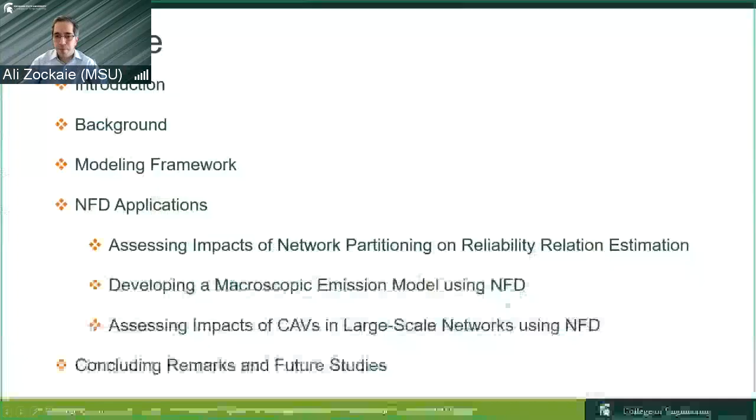This is the outline of my presentation: a brief introduction to the topic and also a brief background on the NFD and the particular topics that I'm going to cover.

The modeling framework is basically the definition of the NFD, the typical definitions that have been widely used. Then we are going to jump into three different applications, each of them a separate paper. I try to combine them together and align them for this talk since they are kind of relevant to each other.

The first application is regarding NFD and network partitioning based on NFD and its impact on reliability relation estimation. The second one is regarding application of NFD in estimating a macroscopic model for emission estimation. And the third is regarding the application of NFD to assess different market share penetration of connected and autonomous vehicles at a larger scale network.

And at the end, we're going to present some concluding remarks and, more importantly, some future research directions that we are following right now.

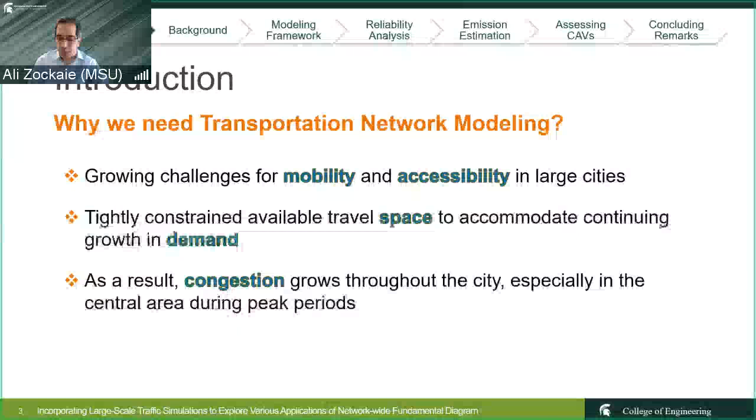Why do we need transportation network modeling? I think the answer is kind of clear for everyone here. We have growing challenges of mobility and accessibility, specifically in large cities, where we have limited space and growing demand because of the trend of urbanization we are following in our lifestyle. As a result, congestion is growing, and there is not much space available to expand the networks.

Specifically at the central part of the networks, which calls for developing strategies to combat this congestion. And to understand and combat this congestion issue, we need to consider the different components associated with transportation networks. So we have travelers, we have the supply network, and the travel demand as the three major elements and components of network modeling.

So basically, travelers travel and experience the supply. Based on that, they would adjust their decisions, and that would compose the travel demand. Then the travel demand would be implemented on the network supply, and again the travelers would have new experiences.

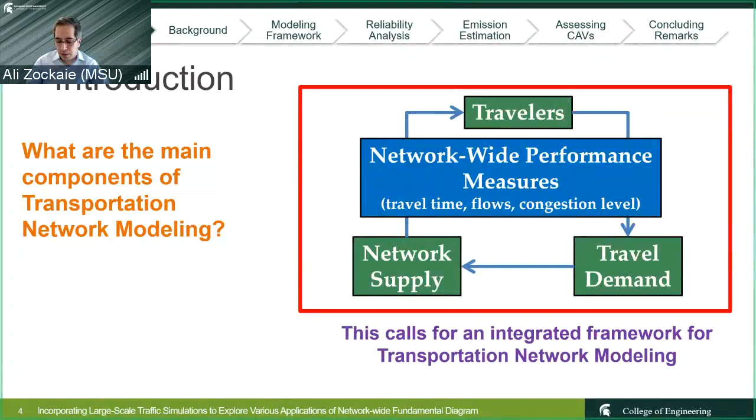And this cycle is going to continue until we reach out to something we typically call user equilibrium. At that point we would have some network-wide performance measures, and the system planner is trying to affect the network supply and the decisions that travelers make to change the travel demand as a result, to improve the system and come up with a modified performance measure.

This is where basically the NFD, Network Fundamental Diagram, also known as Macroscopic Fundamental Diagram, comes into play to assess and evaluate these performance measures at the network level, particularly for larger scale policies, not just localized improvements that we do in terms of congestion, but larger scale policies that we apply for our networks.

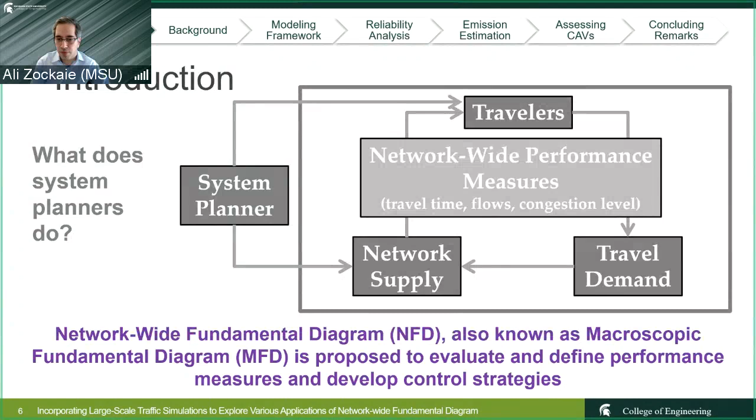So the key research questions we have here are to explore the network-wide estimation of travel time, reliability, and emission production, and impacts of connected autonomous vehicles. We would incorporate the NFD as a tool to monitor traffic dynamics, and also use a simulation-based dynamic traffic assignment tool to estimate NFD.

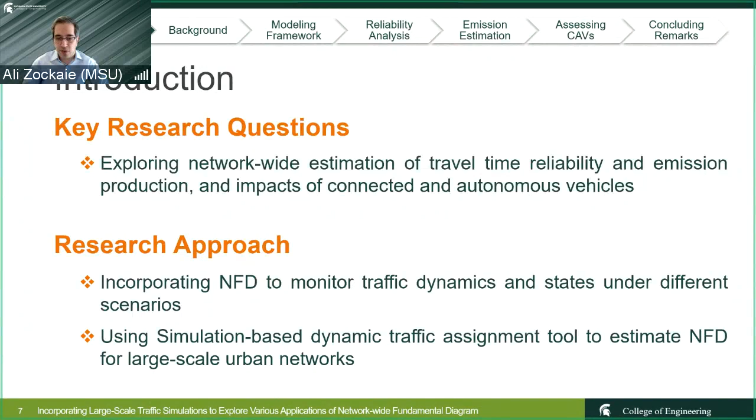So basically, to explore those impacts, we are going to use NFD, and to estimate NFD, we are going to use a simulation-based dynamic traffic assignment tool, which is basically DYNASMART, developed by Professor Mahmassani over the last 30 years, I would say.

So first, a brief background on the topics. The first earlier network level works go back to the 1960s, and Godfrey was one of the first studies in 1969 that observed a non-monotonic relationship between speed and flow at the network level.

Herman and Prigogine developed a two-fluid theory in 1979. And in 1984, Mahmassani et al. presented the network-wide relations between flow, density and speed. They observed via simulation, and in 1993, they observed the hysteresis phenomena.

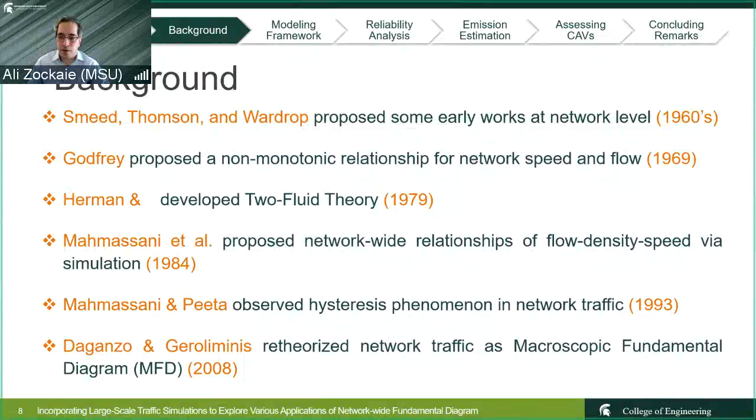Ultimately, for a couple of years, there wasn't any active research in this domain until in 2008 the NFD concept was really theorized and called the Macroscopic Fundamental Diagram. And the study by Daganzo and Geroliminis was one of the prior studies in this field that kind of snowballed into other studies.

Also, in addition to estimating NFD, along with that goes the applications of NFD, significant applications in perimeter control, and more recent studies on macroscopic dynamic routing.

To avoid the computational deficiencies of simulation dynamic traffic assignment tools, we want to move on to more macroscopic approaches, but still capture the dynamics of the network. NFD or MFD provides a great opportunity for that, and there are many studies on that over the last 3-4 years.

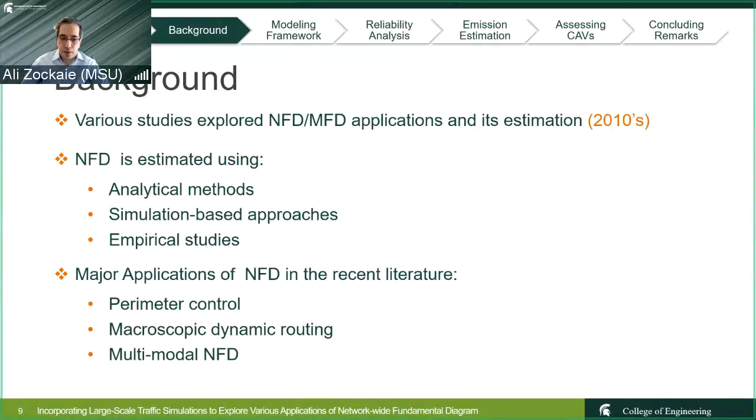In addition, right now multimodal NFD is another approach we are looking at. Back to the limited space that we have, shifting from passenger cars to buses could be an option. There are certain recent studies on multimodal NFD as well.

So with that, we are going to jump into the three different topics that we have and provide a brief background in each. Microscopic simulation, empirical data, and also simulation-based dynamic traffic assignment tools have been developed over the last 10 years to study travel time reliability.

One of the approaches was to capture a network-wide travel time reliability measure, which has been observed via NFD in multiple studies, as you can see here in this slide.

One of the major things we felt is that the homogeneity of the network is a key component of NFD. Once we are dealing with a heterogeneous network, there are certain studies working on partitioning the network into more homogeneous subnetworks.

One of the major things we want to study here is how this network partitioning and having more homogeneous NFDs would affect the travel time reliability relation estimation.

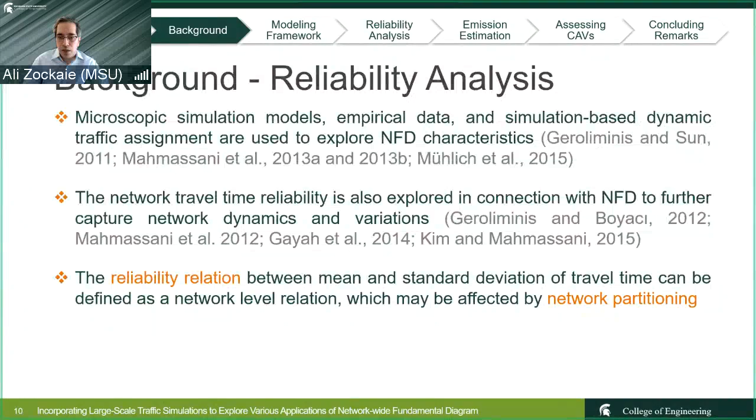In addition, a kind of different topic in terms of emission estimation: we have microscopic modeling as one of the approaches in this domain. There have been lots of studies there, and there are packages already available for that, like CMEM and MOVES-Lite.

On the other hand, we have macroscopic emission models as well, with certain tools developed for those too. The issue with the microscopic model is similar to the issue we have with traffic simulation: they are resource intensive and cannot be applied to larger scale networks. The major issue with macroscopic models is that they ignore the vehicle dynamics, traffic dynamics basically.

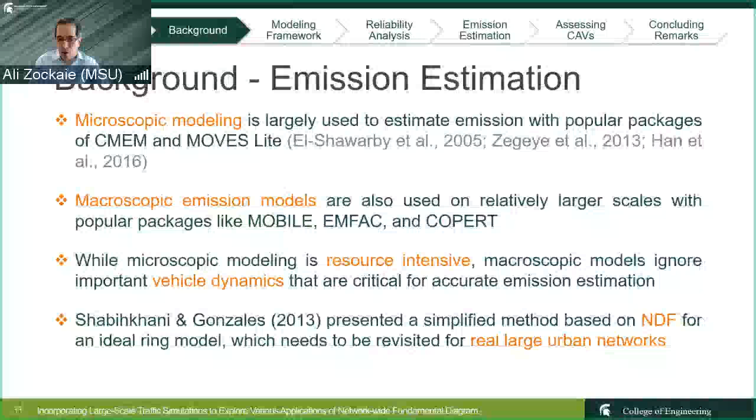One of the earliest studies related to what I'm presenting today was done by Shabihkhani and Gonzales in 2013, where they tried to relate NFD with emission estimation, but it's simple, using the ideal ring model for basically an intersection control concept. Now we would like to revisit that concept, but apply it to larger scale urban networks.

Finally, the third application we are going to cover is about assessing the impacts of CAVs on transportation networks. At the segment level, there have been lots of studies in this domain, most of them applying microscopic simulation.

But at the network level, there are only a few studies that have been done. I've listed three of them here. Still, there is a need to consider certain elements in the evaluation of CAVs at the network level, considering mixed traffic combining regular vehicles.

I know that RVs might be a little misleading, with trucks, vans, and RVs, but here we are referring to regular vehicles. CVs refers to connected vehicles, AVs refers to autonomous vehicles, and CAV stands for connected and autonomous vehicles in terms of terminology.

Considering a mix of these different vehicle types during the transition period from the regular and conventional vehicles we have right now towards a fully connected and autonomous system, there is going to be a transition period, and it's important to capture network characteristics during this time.

We would have heterogeneous drivers in terms of regular drivers, regular vehicle drivers, and also connected vehicle drivers, so we need to consider that factor as well.

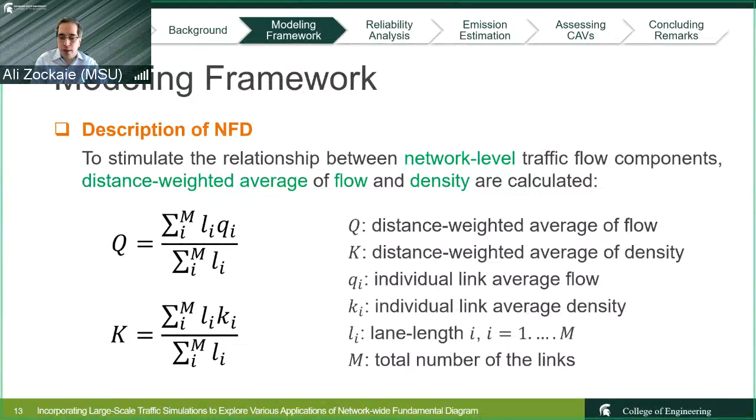One of the key important factors in defining the average flow and average density over the network is to calculate the weighted average. There were some early studies in this domain that ignored this fact. I recall when I was a PhD student, trying to define an NFD, the shape wasn't well defined without this weighted average. So it's important to calculate it based not just on length, but also on the number of lanes. The length of the links plays an important role in capturing the average flow and density in the network.

The other part of the modeling framework I'd like to talk about is the definition of the travel time reliability relation. It has been observed, by applying simulation-based dynamic traffic assignment tools, that you can define a relation between the mean travel time and the standard deviation of travel time. Once you know the mean travel time, you can estimate the standard deviation using linear regression, or other models, though at the network level the linear model shows promising results. One key element is that travel time needs to be normalized by travel distance, so mean travel time per unit distance is linearly related to the standard deviation of travel time per unit distance at the network level.

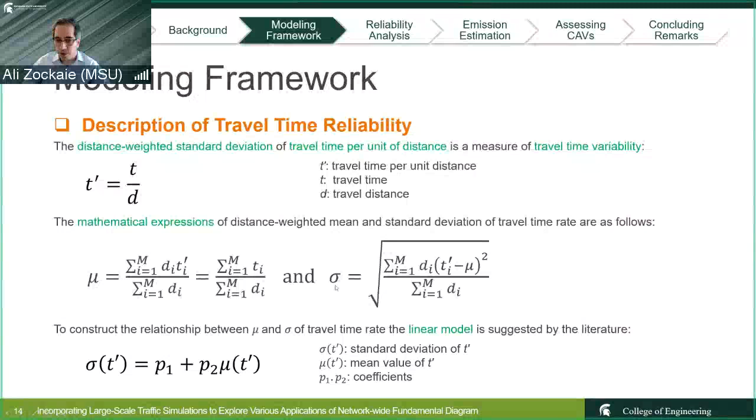As you can see, the relations are shown here. We've defined T prime, which is T over D, essentially pace, the inverse of speed. We use the weighted average based on the distances between different links in the network to calculate the mean travel time, and also the weighted average over the deviations from the mean value of travel time per unit distance to capture the standard deviation. Ultimately, we have the standard deviation related to the mean travel time per unit distance, with two coefficients that need to be estimated for the reliability relation. With that, we'll go through each study, and then come back together to discuss future studies relating these three applications to each other.

For the travel time reliability analysis, the main objective is to improve reliability estimations by incorporating the NFD. In that regard, we need to apply partitioning techniques.

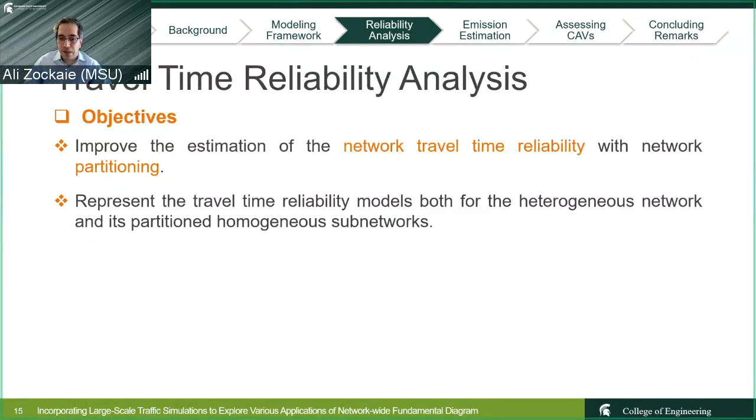One thing that needs to be considered is that clusters should be defined with certain constraints, so that links belonging to the same cluster are all connected to each other. We wouldn't want islands of links conforming to the same cluster. So connectivity is an important issue to be considered.

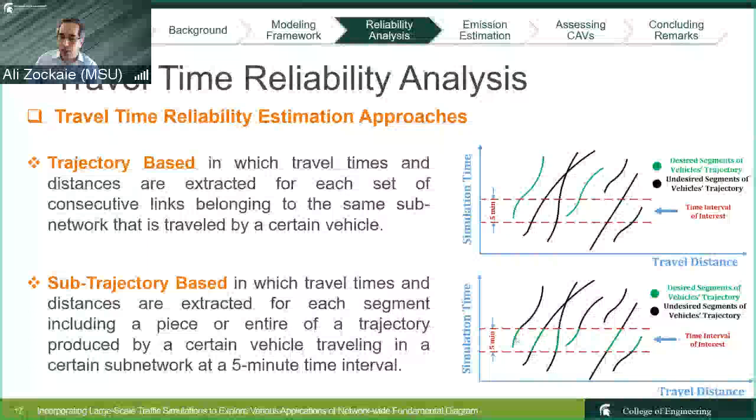In the other approach, the sub-trajectory approach, we focus on the actual travel the network experienced during that 5 minutes. In this case, you don't care when the trajectory was generated. If a vehicle trajectory is traveling in the network during that 5 minute interval, you just capture that 5 minutes of the trip for that trajectory, which might be less than 5 minutes—not necessarily equal to 5, since it might have been generated within that interval—and the distance would be whatever is associated with that.

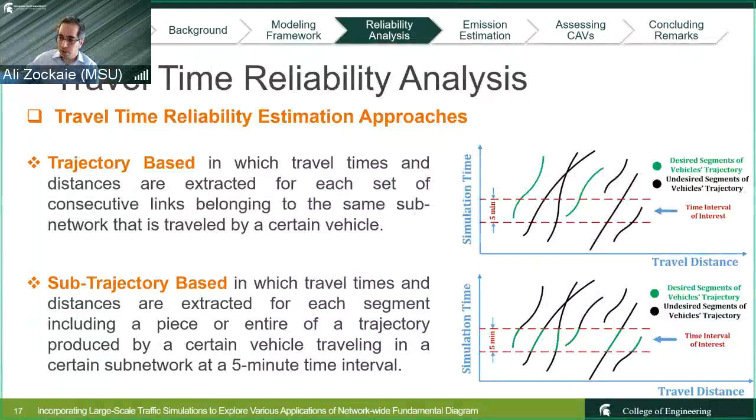And for the other ones which have been generated earlier, we would have the travel time equal 5 minutes, and we would just divide it by the distance that they have traveled in that 5 minute interval. Then we would calculate the average between these values and also the standard deviation, and that would be one data point. Then we would move on to the next 5 minute interval, which would give you another data point to be able to calibrate the linear relation.

So basically, to observe the impacts of the network partitioning, we considered a larger scale network. As you can see, we have the Chicago metropolitan area network, which has been simulated, with 40,000 links, 13,000 nodes, and 2,000 zones.

This is the demand profile that we have for the entire day, as you can see. So we have some base demand that would always populate the network, even during what I think is midnight, so this is kind of early morning. This is again late in the night. This is kind of the base demand that we have over the 24 hours. This is the AM peak, this is the PM peak.

But to be able to apply the net partitioning algorithms and also to have a better sense of the congestion, because this network is really large and there might not be much congestion around here, we decided to just focus on a subset of this network, as you can see here, which includes about 10,000 links, and perform the clustering approach for that. And to just give you a scale, this part that you can see here is just the CBD, or Central Chicago downtown area, basically. We should call it the Loop as well.

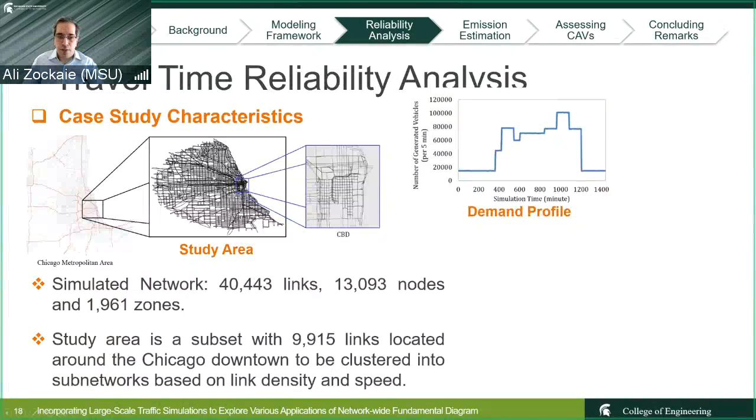So this is the study area where we are trying to estimate the travel time reliability measures and also perform the clustering or partitioning. So this is the simulation result, just showing the results for the AM peak, PM peak, and the off-peak period between.

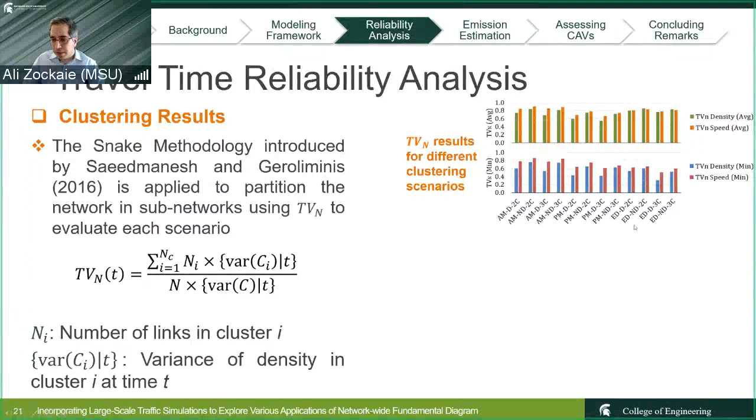So here are the results for different scenarios that we have used. First of all, we have done different analyses for AM peak, PM peak, and the entire day, AM, PM, and ED. Also, we have tried 2 clusters and 3 clusters, and we have tried the directional and non-directional approaches that I just talked about. So as you can see, for AM, we have 4 cases: 2 clusters and 3 clusters, directional and non-directional, and we have the same thing for PM and the entire day as well.

And here the results are shown. Clearly, in all of them, you can observe that once you move from 2 clusters to 3 clusters, the TVN is improving. So that shows that the 3 clusters have better characteristics in terms of homogeneity of clusters. If we increase the number of clusters to 4, it is expected to have an even lower TVN. However, that would make the computational efficiency significantly problematic, so that's why we just stopped at 3 clusters to show the applications of the NFD and its impacts on the reliability measures estimation.

Here we have shown two different measures for TVN. One is just the average value over the day, and the other is showing the minimum observed TVN over the study period. So here's AM peak, here's PM peak, here over the entire day. This is the minimum TVN that is captured, but this is the average over the entire day.

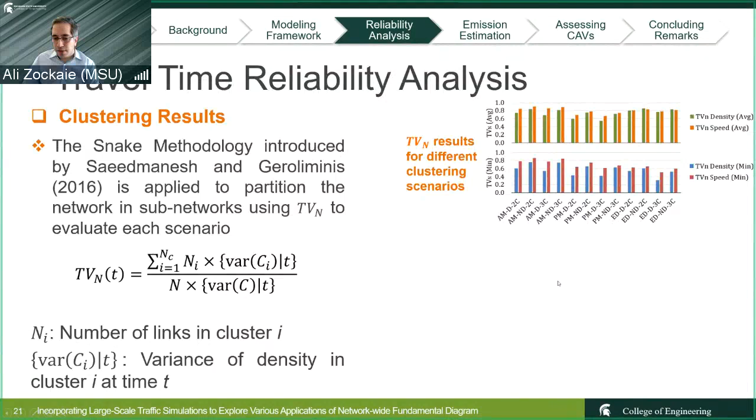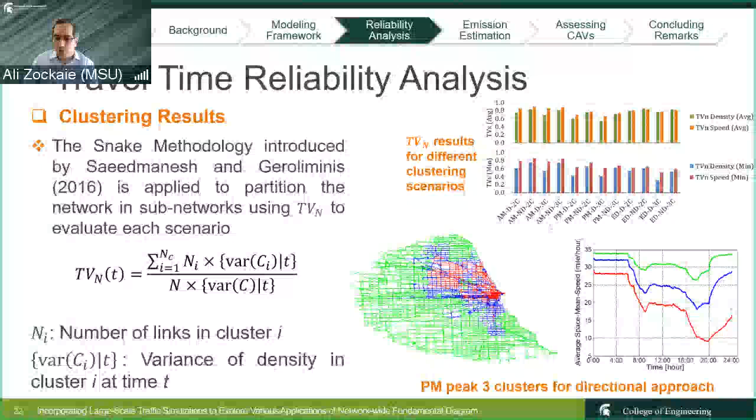And this is just one sample of the clusters. As you can see, the really low congested area around the network, illustrated by green here, is the speed profile for that cluster. Then we have the red and blue, which are moderately congested and severely congested clusters. So this is showing the clusters for PM peak, the three cluster case, applying the directional approach. This stands for PM, directional, and three clusters. So this is the TVNs associated with this scenario.

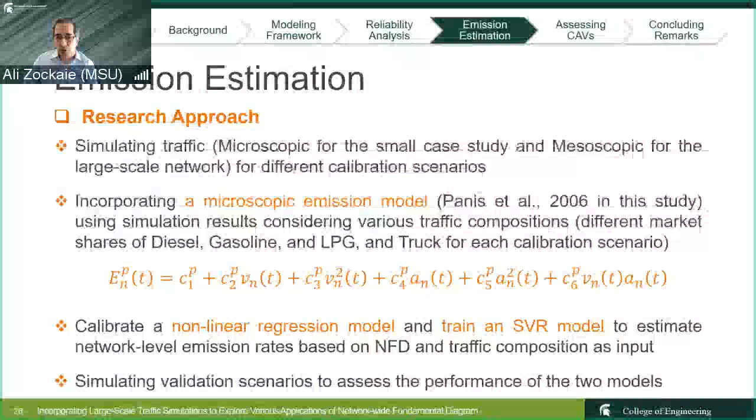Once we simulate the traffic, we apply a microscopic emission model. In this case, we went with the Panis model, which is a function of velocity and acceleration. For different vehicle types—diesel, gasoline, LPG, and truck—we have different coefficients for velocity or acceleration.

So once we do the simulation for different scenarios, we're able to apply the micro emission models and get the actual emission generated at the network level.

Then we have calibrated a nonlinear regression model, and we have trained an SVR model to estimate the network level emission based on two factors: one is the NFD or MFD, the network fundamental diagram statistics, and the other is based on the traffic composition.

So it's not just about how much congestion you have, it's also about how much emission is generated by those vehicles. If you have a network with all electric vehicles, for instance, there won't be any tailpipe emission generated there. This is an important factor that needs to be considered.

Also the NFD, showing whether the network is congested or not, what the accumulation of vehicles in the network is, and all of that—they impact the emission, obviously. Ultimately, we simulated other traffic scenarios to validate the nonlinear regression model and the trained SVR model, to compare how well they estimate the emission.

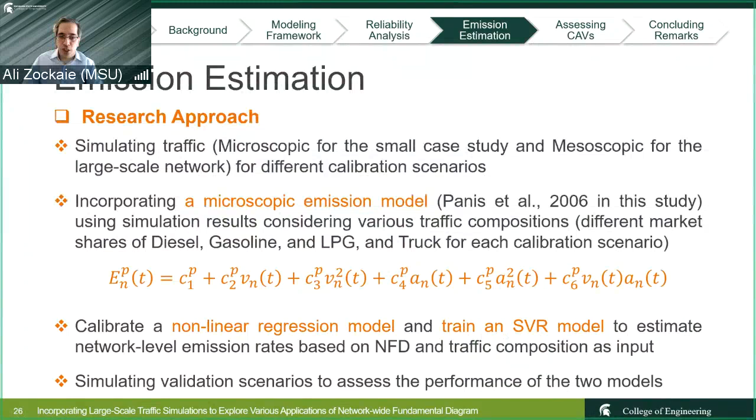So just by knowing the NFD characteristics at any given time—the average flow or average density at the network level—and knowing the traffic composition, how many of which vehicle type we have at the network level on average, we can use the macro emission model developed in this study to get the macro emissions, and we would have the network emission diagram that we'll talk about at the end.

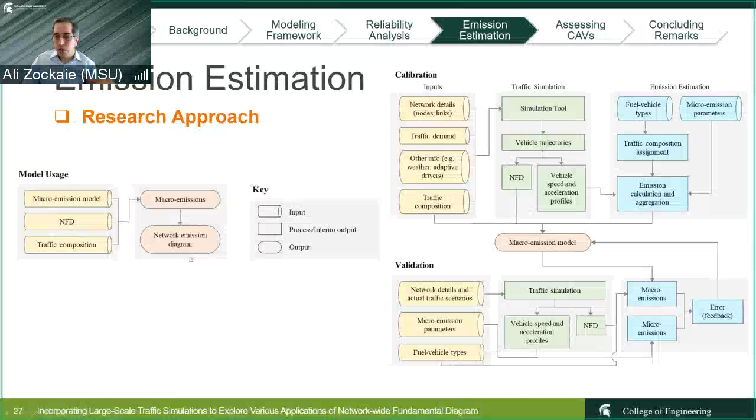So here's the calibration process: we run the traffic simulation, apply the micro emission models, calculate the emissions, calibrate the macro emission model, and then we apply validation scenarios to compare the macro emission and the micro emission.

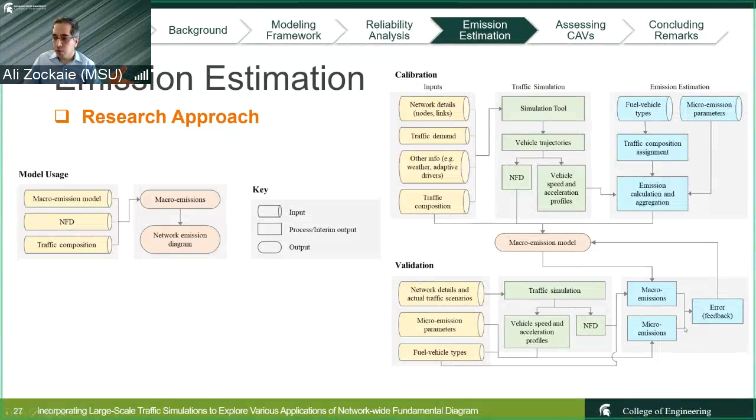The macro emission comes from the macro emission model trained and calibrated here, and the micro emission comes simply from simulating the validation scenarios. Then we have the errors that we'll discuss in the numerical results.

Here we have O'Hare Airport, if you're familiar with the network. And here, somewhere around here, we have Northwestern University's campus in Evanston.

This is the demand profile for one particular scenario—this is how the demand is changing downtown, and this is how the generated vehicles are changing in the Chicago CBD. This is defined as Chicago downtown, this is defined as Chicago CBD.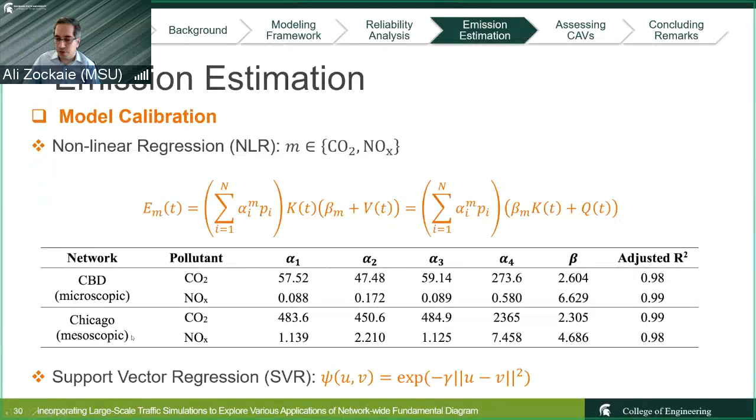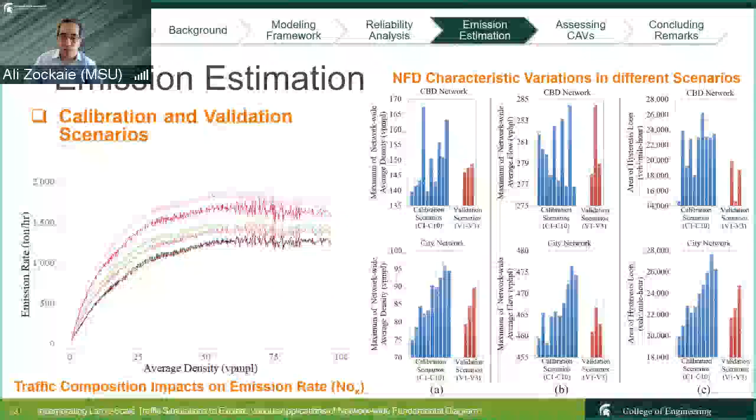The results demonstrate that the average error is less than 10%, which is acceptable, and the SVR model is doing much better than the nonlinear model. However, even the nonlinear model might be around that percent. For the SVR method, it was below 5%. Obviously, the SVR model is outperforming the linear and nonlinear emission models.

And here is the network-wide emission diagram. One thing that should be noted in this diagram is that we are showing the emission rates, not the total emission. Having lower emission rates here by itself doesn't mean the situation is becoming much better.

It could be that you have much more emission overall, because the emission rate might come down as speeds come down, but the vehicles would be on the road for longer time because now the output rate of the network is dropping as well - basically the flow rate is dropping, so vehicles stay on the road longer. So the total emission generated would be higher. Although we observe a reduction in emission rates, since those lower rates are generated for a longer time, overall more pollution would be generated. That needs to be considered.

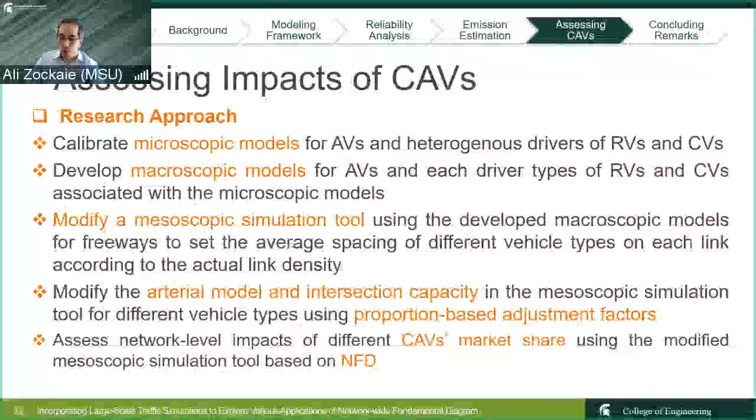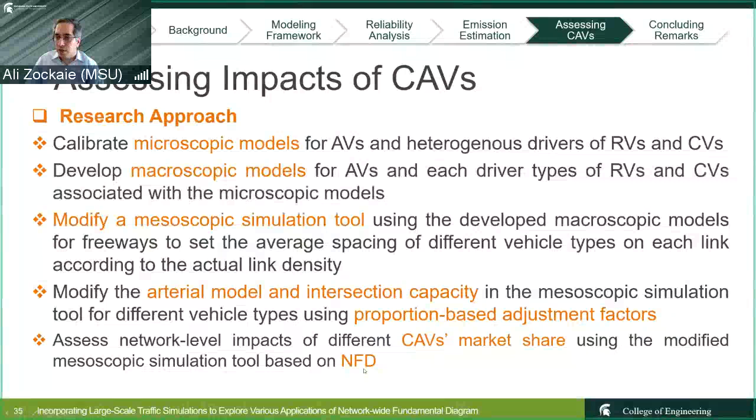So that's the major modification we have done for the freeway portion. We also modified the intersection capacity and arterial models, but due to lack of data in the arterials and intersections, we came up with some proportion-based adjustment factors defined based on comparison of the freeway models for different proportions of CAVs or regular vehicles. Ultimately, we assessed the impacts of different market penetration rates on the NFD and showed how different penetration rates of CAVs affect it.

For micro simulation of vehicles with no communication, we used the model presented by Hamdar et al. in 2015, but considered the heterogeneity among drivers, defining different microscopic models for different driver types. For V2V, since we don't have data, but to capture the impacts of connectivity, instead of using the Hamdar et al. model, we use the IDM model, which is more deterministic. We assume that the more information we have, the stochasticity would reduce.

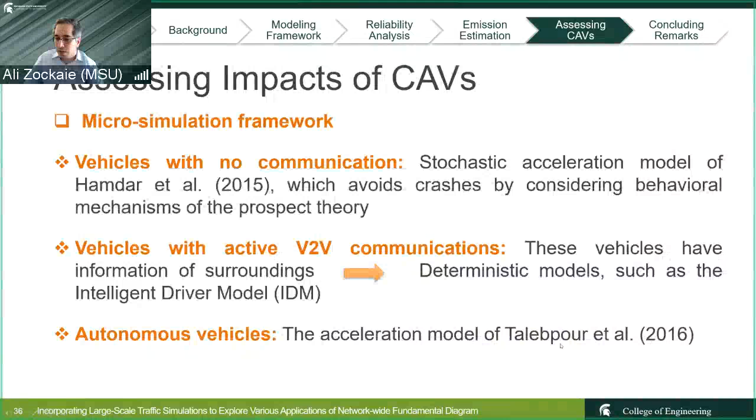Each of these stands for different models for the heterogeneous drivers we have, based on speed and different proportion of vehicles. So we have different vehicles belonging to different vehicle types at different links, and they would have different spacing on the link based on their speed. We calculate the weighted average of the spacing, and the inverse of that weighted average would be correlated with the density at the link. That's how we come up with the macroscopic approach.

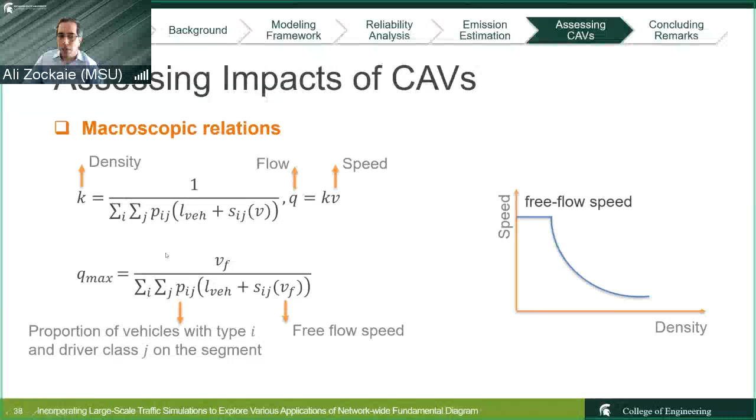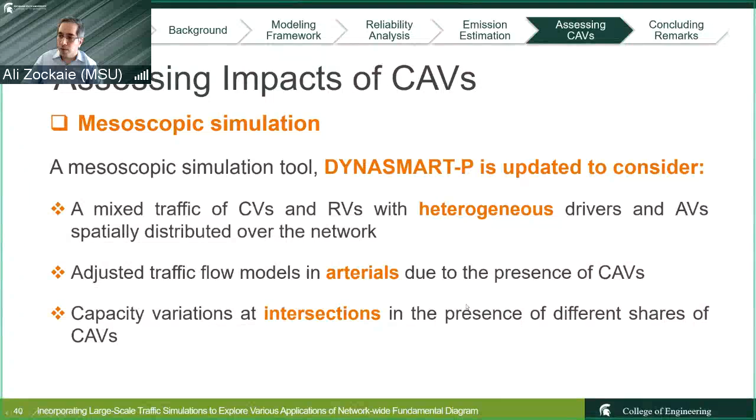Ultimately, for the mesoscopic simulation, as I mentioned, we use the average macroscopic model approach for the freeways. For the arterials and intersections, we simply use the adjustment factors we load, based on the relations observed on the freeway and mainly the maximum flow rate.

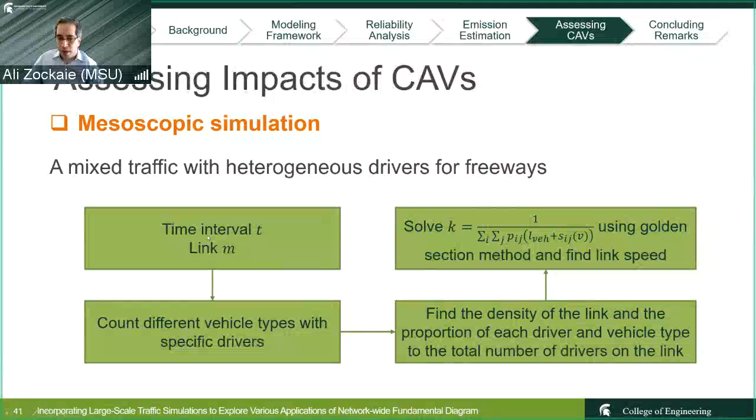So here is again the explanation on how the mesoscopic simulation works. At any given time and for any given link, we know the different vehicle types on that link. We know the number of vehicles divided by the lane length, which gives us the density. Then we try to find the average speed, which gives us the average spacing, calculated for different vehicle types on that link. That gives us the same average spacing, whose inverse would be equal to the density.

So to solve this nonlinear problem, we apply the golden section method, and we have solved it and simulated the traffic. Similar to before, we considered the Chicago City downtown network for simulation, looking at 5 to 10 a.m., with around 800,000 vehicles simulated.

We assumed in the base case scenario that 25% of vehicles have access to en route travel time information, but we assumed all CAVs would automatically have access to en route information if a vehicle is connected or autonomous.

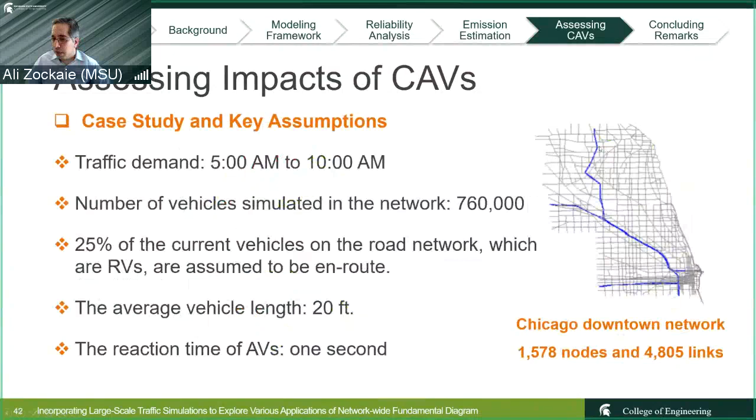Now we have added adaptive traffic flow models on the freeway links. As you can see, a significant shift between autonomous vehicles and connected vehicles can now be observed. However, it's not that significant, mainly because in this network, as you can see, the blue lines are the freeways, and most links are arterial—there's not much freeway available. So it's expected that alone, we wouldn't observe much impact from this modification to the simulation tool.

Once we apply the arterial links, you can see the difference between red and blue is more significant. We also adjusted the arterial link models based on the freeway models for comparison. Then, once we apply the intersection models, you can see much more improvement, and a much more significant difference between connected and autonomous vehicles.

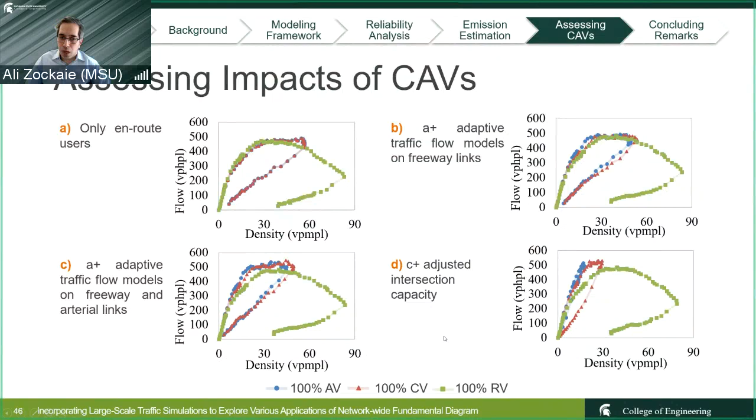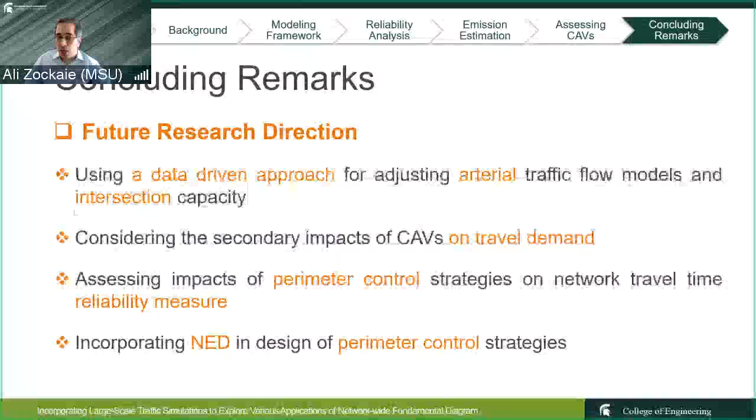So with that and the conclusions, we showed the applications of the NFD in different applications like travel time reliability analysis. We showed how network partitioning plays an important role there. We showed how we can use NFD to estimate a macroscopic model for emission, considering the dynamics of the network. And also we showed how we can use NFD to assess the impacts of connected and autonomous vehicles at the network level.

For future research directions, the main reason I included these two together is that, first of all, we still need data-driven approaches for arterials to modify the models we talked about. Instead of just going with the adjustment factors we developed, we can use data-driven approaches with new sources of data on the arterials, with and without connected and autonomous vehicles.

Also, we would like to consider the impacts of CAVs on travel demand as well. What we showed here was that the demand is fixed, but vehicle type and vehicle combinations are different, so how would the scenarios look. But obviously, if you reduce congestion, there would be more people willing to use the roadways because it's less congested, so there would be some demand following up on that. Also, if you have an autonomous vehicle that you're not driving yourself, you're willing to make more trips as well because you have a reduced value of time. That's also another important factor to be considered in future research.

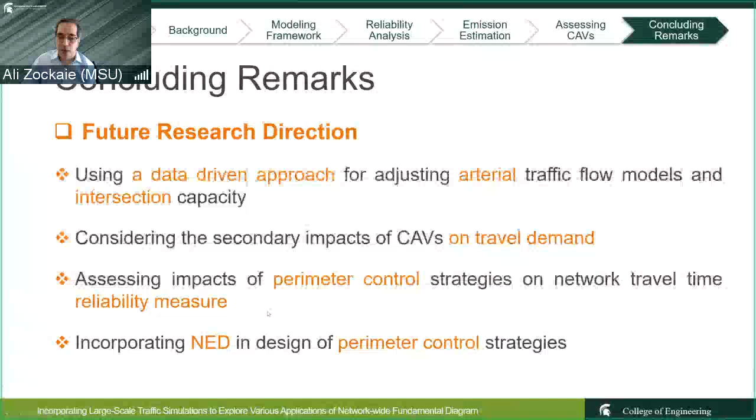But the last two, which are my favorite ones, are to apply perimeter control strategies and see how the perimeter control strategies and the clusters would change the network travel time reliability measures. We expect there would be significant improvement, but it's good to study it. And also how to apply the NFD concept we talked about for perimeter control strategies - another interesting topic for future research.

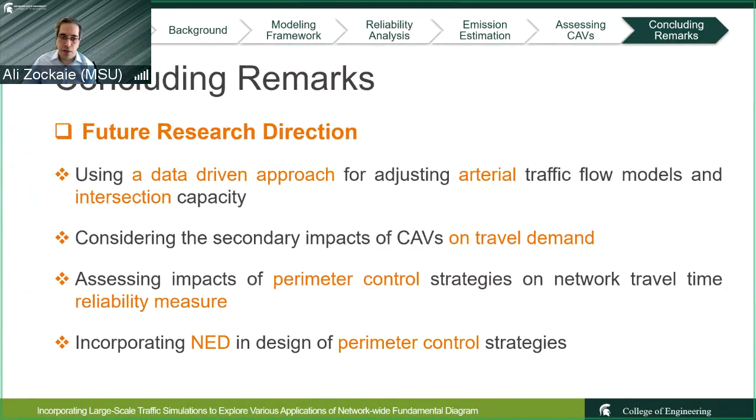Here are my great collaborators. I'm honored and it's my pleasure to be a student of Hani Mahmassani's group. I've learned a lot and will continue to in the future. For travel time reliability and clustering, Nikolas and Mohammad Reza Saeedmanesh from EPFL, they helped us a lot. Miyad is my dear friend, and we have worked on the NFD concepts in multiple papers together. Ali Reza helped us with the micro simulation portion of the connected and autonomous vehicles.

And my dear colleagues at MSU, without whom this research wouldn't have been possible at all. Specifically Fatima, I think she should be on this call as well, for her great work on connected and autonomous vehicles and modifying DYNASMART. And these are the three publications, all happening in 2020, for each of the topics I covered.

And with that, I'm going to stop. Sorry it took longer than what I expected. I think I wasn't paying attention to the time in the first part and spent lots of time on that one, sorry about that.

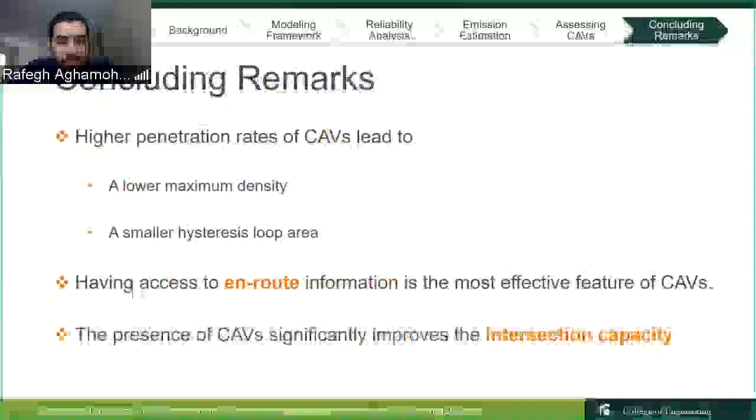So I'll go first, I have a few questions. You can go back to slide 23. Cannot see the slide numbers. Oh yeah, yeah, it's...

Okay, so you show some MFDs there on the top row. Are those the MFDs for the whole network or for clusters? So first of all, there are NFDs of the peak period, I think PM peak, so that's why we are observing really short period changes there.

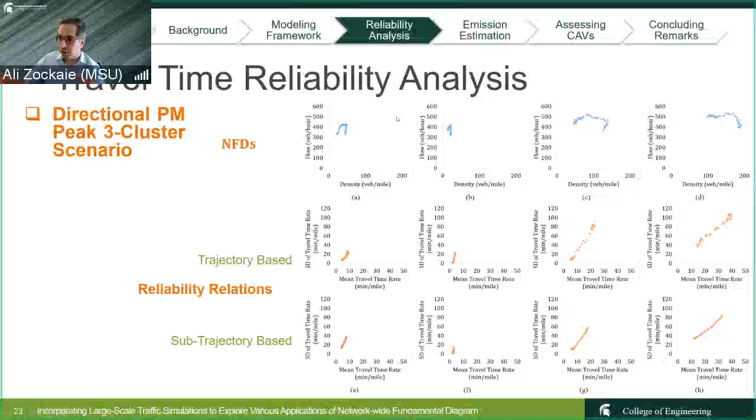And the first column here, for NFDs and reliability relations, is where you have just one cluster - so it's one network for the entire network. Then I should have explained that better, sorry about that. The second column is for the three clusters that we have - cluster 1, cluster 2, cluster 3. In a way, you can say the average of clusters 1, 2, and 3 would give you this. So the average of these three would be equal to this one. And as you can see, there is much similarity between this one and the first cluster, because the first cluster has the largest size, so obviously the average would be closer to the one with the largest size.

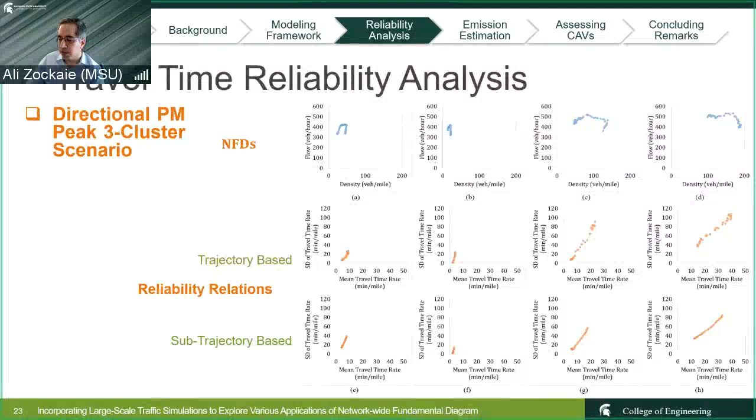So another question about the second part: do you use, for the emissions estimation, only one MFD for the whole network?

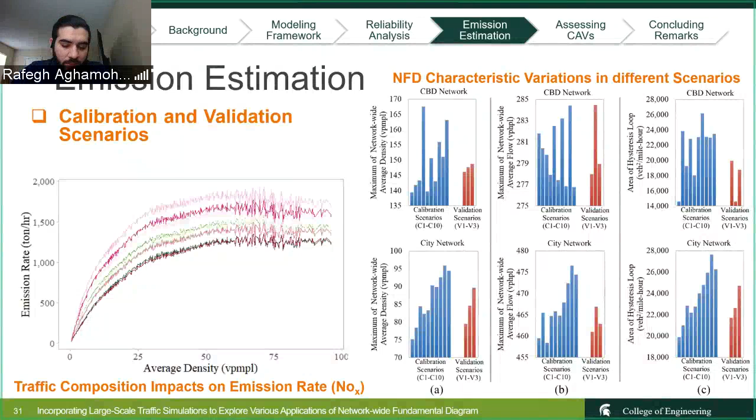So as you can see here, we had different observed NFDs for the whole network. For each simulation, you derive different MFDs - observed NFD basically, and simulated NFD. So we simulated different NFDs for each scenario.

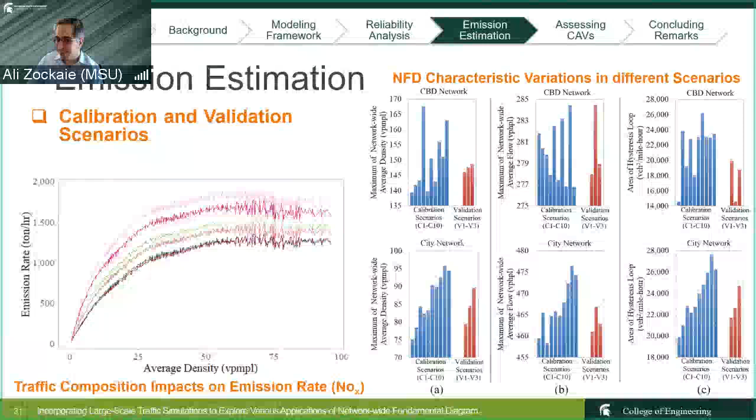In addition to the NFD, we also tried different vehicle combinations to generate the emissions. If all the vehicles were diesel, or all gasoline, the emission rate would be different. So for the calibration process, we had 10 different NFDs, and you can see their features, how they differ - here's the maximum density, changing between 140 to 170.

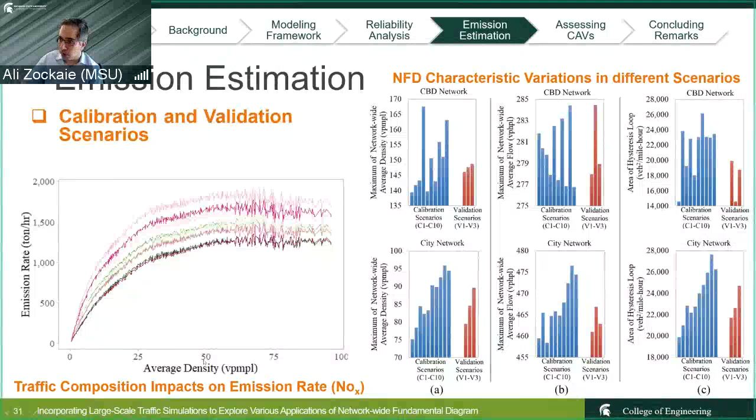This is the maximum average flow observed in different scenarios, and this is the area of the hysteresis loop, changing over the different scenarios. We simulated all these scenarios with different micro emission models for the traffic compositions as well, which gave us the huge data sets used to calibrate the macro models.

I have a couple of quick questions. My name is Baher Abdulhai from U of T, University of Toronto. If you could go back to slide 19.

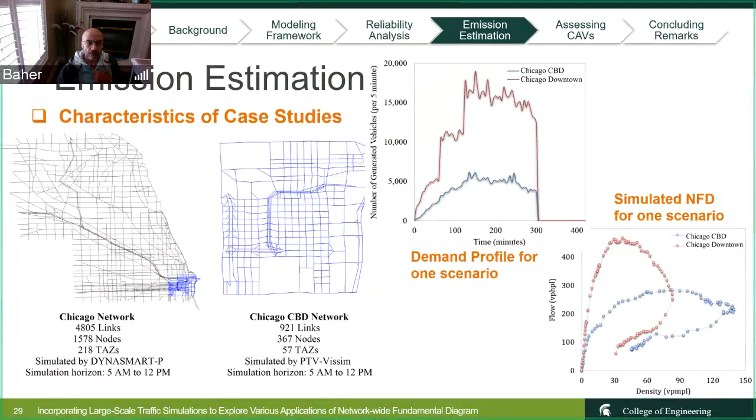On the top right, you have - I don't understand the MFD there. It's peaking at flow of about 400, then at density around 20 it dips, and then goes back up and dips at a much higher density. You mentioned one was afternoon peak and one evening peak - I didn't get that. Shouldn't it be one MFD?

So basically this is the observed and simulated NFD. We're calculating the average flow and average density every 5 minutes, and just showing the data points associated with each 5-minute interval. So this is early morning here - you have really low flow in the network, you have really low density. So if you want to talk about the existence of one NFD for the network...

If you kind of continue from here, if you do not do any unloading, and continue loading, your NFD would continue something like that, most likely. So what happened here is that every 5 minutes the network is getting more congested - it's AM peak, the flow is increasing and the density is also increasing.

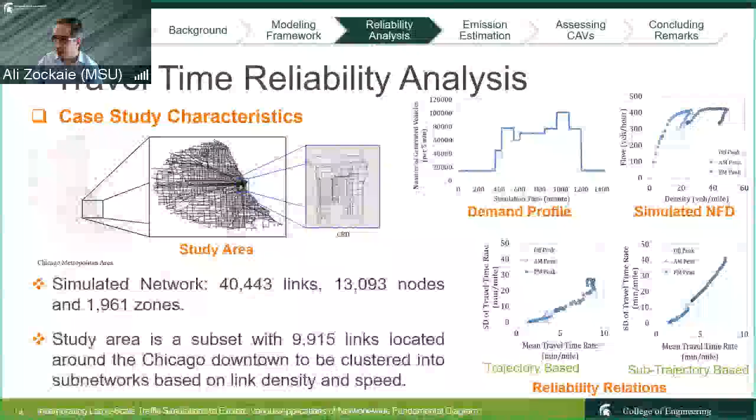And then at some point, around here, the network starts unloading, and that's why the flow and densities start decreasing. After the offloading for a certain amount of time, which is basically here, you're going to start loading the network again, as you can see. So the dip in the middle is because of the offloading in between the peaks - exactly.

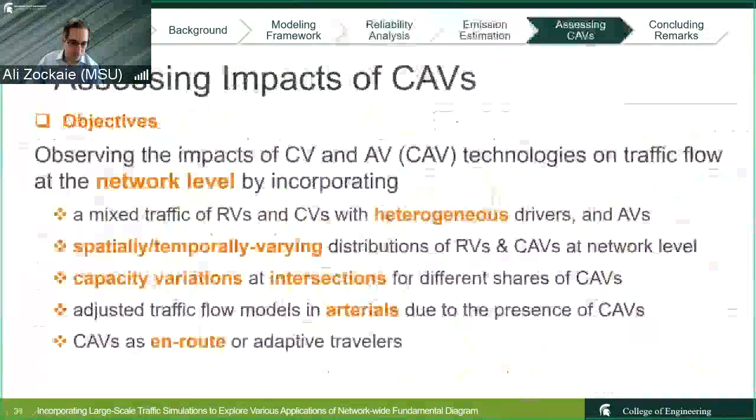Okay, the second question, thank you. The second question on slide 39. Okay, now it seems to me that you're estimating a macro model based on what you get from micro models.

So what I'm trying to say is that you might be overestimating the benefits of AVs. And if you're taking this and generalizing over the network, then again you're overestimating the benefits of AVs all over the place. So this is my feeling - I'm not sure what you think of it.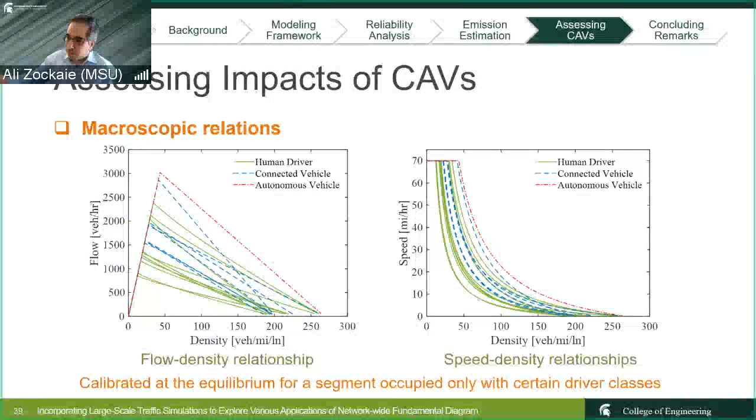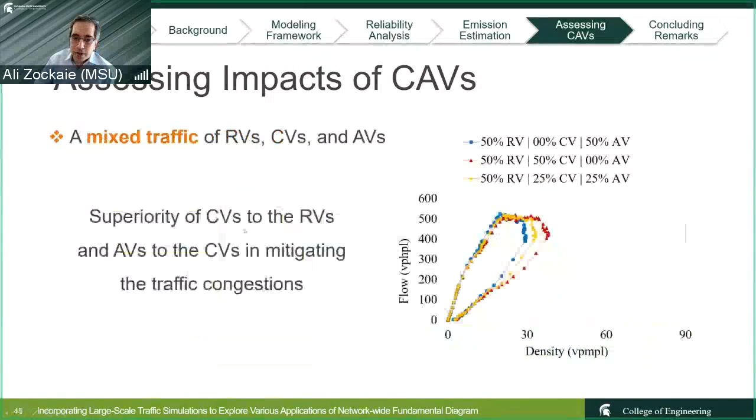But ultimately, once we are using these macroscopic models into our mesoscopic simulation tool, then the bottleneck, the feedback of the queues and everything from one link to another link, they would come into play and would reduce the maximum flow rate significantly. As you can see in the results we got here, the flow rate that we are estimating for the network is around 500, 600, you can see.

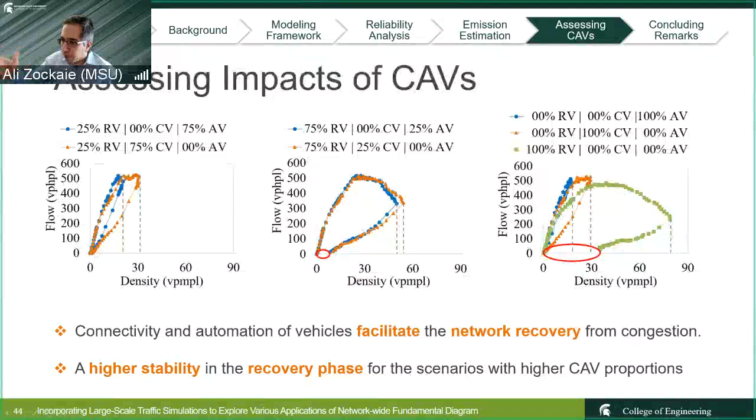But some part of it is because it is averaged over all the links, and not all the links are at the maximum. But I'm 100% sure that if we just focus on the links that are having high flow and calculate those average numbers, we are not going to observe this much, 3,000 vehicles per hour, in the network. There's no way, because of congestion.

Yeah, I like your point about that. Now once you add the ramps, then you're talking about an NFD, not a fundamental diagram at a point. Okay, thank you. Thanks for the great question.

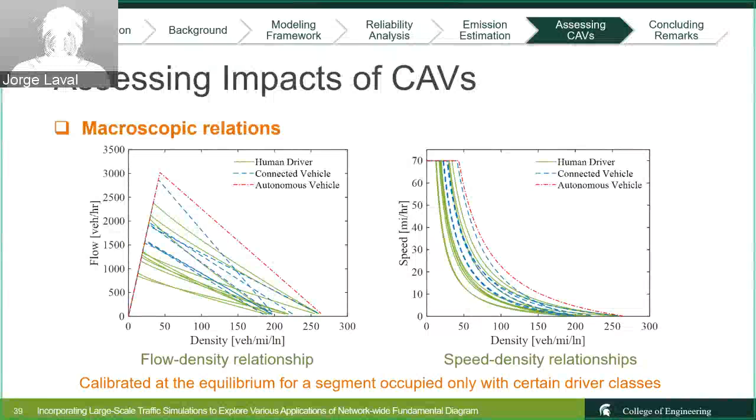Hi Ali, I have a question. Sure, I apologize if they asked it already because I got disconnected, but I saw you showed some pictures showing the standard deviation and the travel time, right? And now those standard deviations are huge compared to the travel time. So I'm wondering what's going on. You see, the standard deviation is like 2 or 3 times the mean travel time.

Well, that's the pace, right? Yep, yeah. So I'm wondering, because that's really unusual to have such high coefficients of variation, standard deviation divided by the mean. So I wonder if you look at those.

Actually, these are what we have observed at the network level, and it kind of shows how heterogeneous our network is. And that's why when we do the network partitioning, that helps and improves the estimation of the reliability measures.

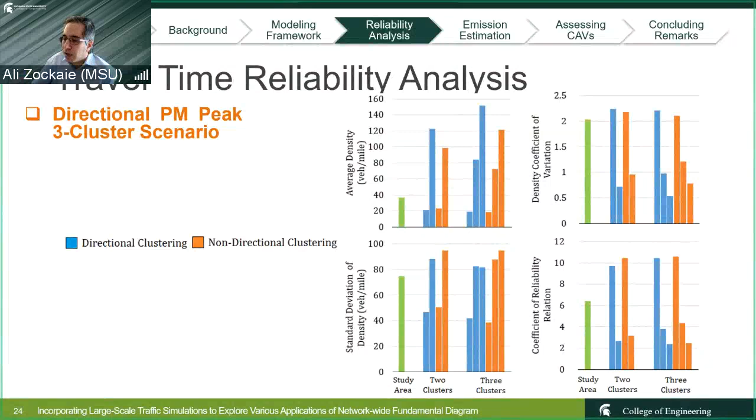Let's go back to, yeah, I would like to. So basically those factors that we're talking about here, correct? These measures here, correct? So here it's 6 on average, I think this is for the PM peak, correct? What we were seeing there was the entire network, entire day. Now here it's for the PM peak, so that number is 6 times, kind of, as you can see, for certain subnetworks, for the clusters.

Wait, but hold on there. So 6 times, if it's a coefficient of variation, sigma divided by mu, basically, right? It is, yeah. That is almost non-physical, it's like a chaotic system, chaos. So that's exactly my point.

As you can see, this 6 is reduced to almost 2 for the congested portion. Right, these 2 are the congested cluster, and this even, kind of, is the really high non-congested clusters, where you do have significant variations because they are not congested, there are vehicles traveling around.

So are these values common in the literature? Yeah, I think the results we got were consistent with previous studies. But one thing you need to pay attention to is that these are not the travel time, they're travel time per unit of distance. Yeah, but still, maybe that's the reason we're observing such factors.

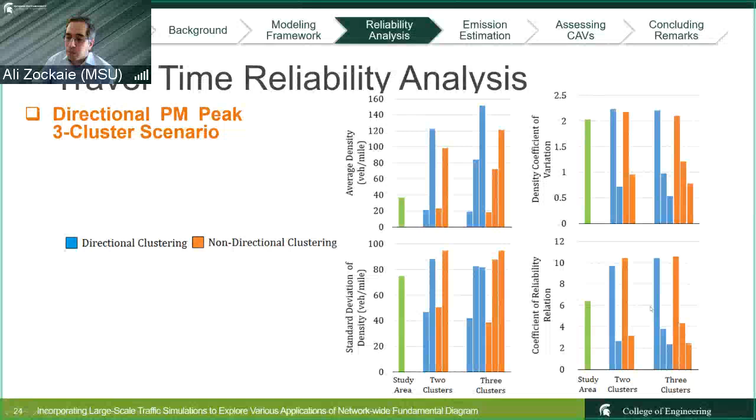No, I don't think so. I think it's better to do it like that, per unit distance. But yeah, it strikes me as too high for me.

Did you plot a histogram of these travel times? Because it's not going to be normal if it's like that. It's maybe a power law. That wouldn't be surprising, power laws having this type of coefficient of variation, right?

But typically those orders of magnitude are for other random variables, such as stock prices or population of cities, whatnot. But travel time, to me, is kind of striking. So...

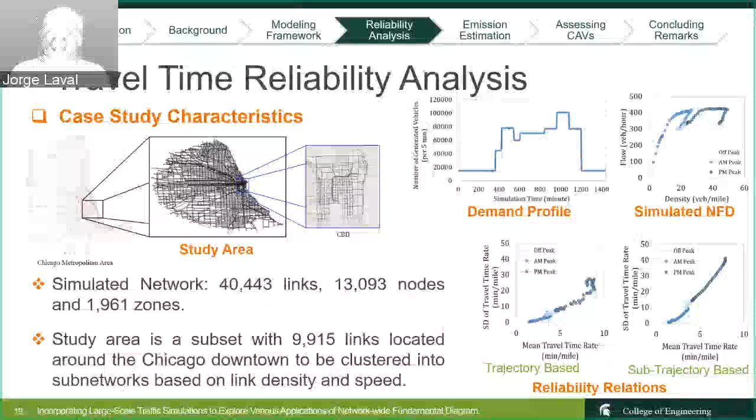All right, I will look into it. It's a great point, so I will try to get the histogram of it. I didn't try that. Yeah, in engineering you seldom come across coefficients of variation greater than 1. The exponential distribution has a coefficient of variation equal to 1, so that gives you an idea of the type of chaos that's in the data.

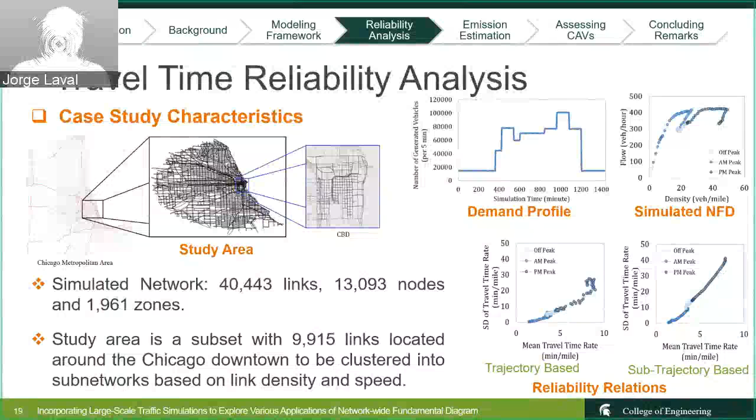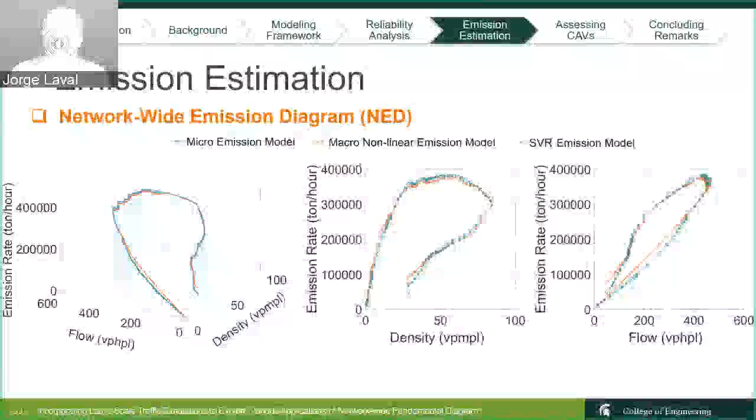Another point I had is with the emission modeling. So you showed the relationship between emissions and density or flow, and then there's a hysteresis. Sorry if you explained it already, but what is the reason for that?

You mean for this? Yeah, the hysteresis loop, so at a given density you have two emissions, right? Yeah, the reason is because we are unloading the network. So basically here's how it goes: up to this point, where density is increasing, we have the loading phase. This is where flow breakdown hasn't happened in the network. You get to the maximum flow, maintain it for a while, and then ultimately gridlock happens.

Then flow breakdown happens, density increases and flow decreases. At this point we've started unloading, and as you can see there's a significant jump here as well because it starts unloading. Then the flow comes down and density comes down as well. Right, so I understand the hysteresis in the flow-density plane, but not in the emissions-density plane.

So again, this is not cumulative emission, this is the emission rate, right? And the emission rate depends on the speed. So once the speed of the vehicles slows down, the emission rate decreases as well because it's directly correlated with speed. And also, once the density is decreasing, that decreases the emission rate as well.